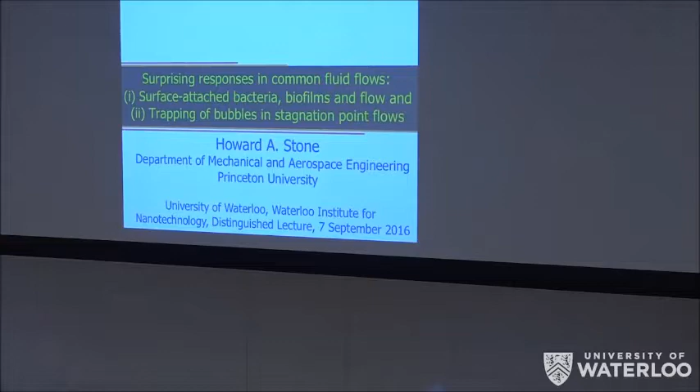But I hope I can tell you something you'll find maybe surprising, maybe interesting, and we'll see as we go. The work I've done has been done by a very talented group of people, my students and collaborators. My group at any given time is about one-third visitors.

Cody Chen in the audience just spent six months with our group. And I get to collaborate with a bunch of people in molecular biology—Professors Ned Wingreen, Bonnie Bassler, and others are all molecular biology professors I'll tell you a little about our work with today. And a variety of other short-term visitors, long-term visitors, graduate students, postdocs, and children in the presentation, I suppose, have nothing to do with the talk other than we're all human.

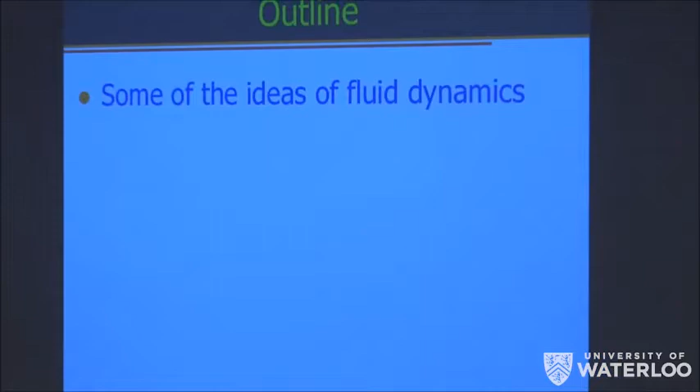Okay, so here's the outline for the talk. I'm going to start with a couple slides that just try to convince you fluid mechanics is interesting as a way to think about the world. And I'm going to have some short stories about bacteria and biofilms. What is special about them is I'm going to tell you about bacteria that live on surfaces, and in the fluid mechanical perspective, since there are fluid mechanical people in the audience, the Reynolds number in this first part of the talk is a small number.

I'll tell you about two different things that happen when you put flow over bacteria on surfaces. You are allowed to express skepticism that anything interesting should happen, since the bacteria are on the surface—the velocity at the surface is very low. What possibly interesting could happen if you have bacteria on surfaces? One reason I say that is the most common problem in fluid mechanics involving bacteria is swimming bacteria. There's a large literature—it's a field in mechanics now called active matter.

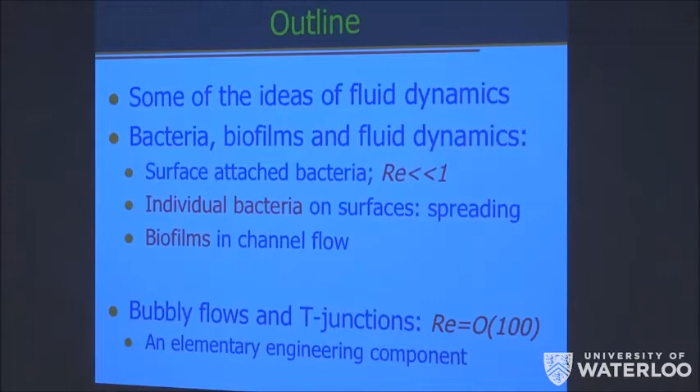The second part of the problem is a high Reynolds number flow problem. Now, I started life doing low Reynolds number hydrodynamics, so with apologies to some people who do turbulence in the audience, high Reynolds numbers for me means anywhere from 100 to 1,000. I'm going to show you flow at a T junction, which is a very simple shape. You've seen it in textbooks, and I'm going to try to convince you that the textbooks and all the researchers missed the most interesting thing associated with the flow. And then I'll try to convince you it's also important, possibly.

Okay, so first, fluid mechanics—why is it interesting? This shorebird lives in shallow water. When it gets hungry, it does the following.

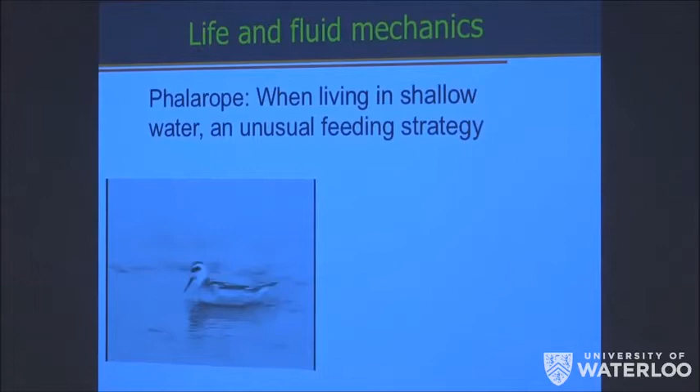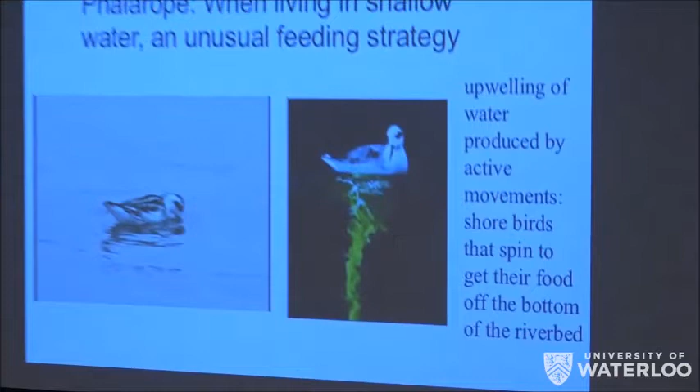Anybody know why? I should say it lives in shallow water and doesn't like to get its head wet. So it does this little routine so it can essentially eat by pecking. The shorebird, because it lives in shallow water, makes a little vortex. The vortex brings up organic matter from the bottom that floats to the surface, and the shorebird can eat without getting its head too wet. Amusing?

I was at an APS conference with 1,000 people in the audience. A former student of mine was giving a talk and showed this video. At the end there were no questions, and I hate it when there are no questions. So I stood up and said, does the fact that the shorebird knows to do this stirring of the fluid mean the shorebird knows more about fluid mechanics than we do? My former graduate student said, in front of 1,000 people, I can't speak for everyone in the audience, but I can assure you the shorebird knows more fluid mechanics than my PhD advisor.

Okay, so that was item one. Item two: the leading cause of death in the Western world associated with eating red meat. Your heart is a pump, so it's a mechanics problem—when it fails, you die. The basic feature is a modest effect associated with the radius of a channel getting clogged by fat, or if you like going to France, too much cheese. But it's a reduction in radius.

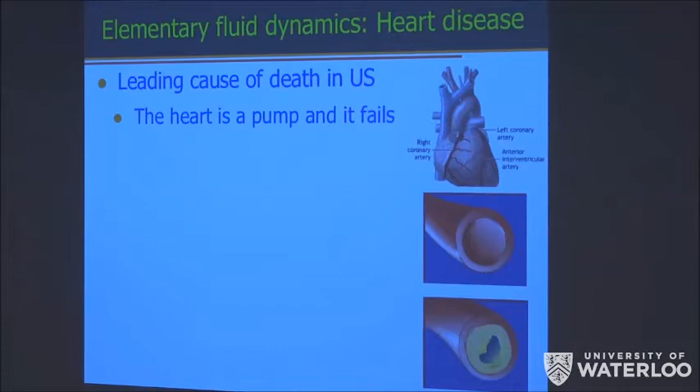This poses a fluid mechanics question you can pose as follows: if I give you a pressure drop in a pipe of a certain length, and the pipe has a certain radius, and the fluid has a certain viscosity, tell me the relationship between the pressure drop and the volumetric flow rate through the pipe. The standard textbook way to answer this is using calculus, writing down an equation, and integrating. But as stated here, you can answer everything by dimensional arguments alone, provided you recognize the dimensions of viscosity, which is standard in a fluid mechanics class, and the fact that you don't need the pressure drop and length independently—all that matters is the pressure drop per unit length of the pipe.

If you make that statement, dimensional arguments lead to the well-known Poiseuille formula, or as a French-Canadian student once insisted I pronounce it, the Poiseuille formula. The volumetric flow rate is proportional to pressure drop per unit length, inversely related to viscosity, but it depends on the fourth power of radius.

For those of you in microfluidics, you know this is a large effect, not a small effect. This geometric effect means that unlike many engineering problems where small causes produce small effects, this small cause produces a significant effect. In fact, it raises the question: if you have a 10% reduction in radius, what's the reduction in flow rate?

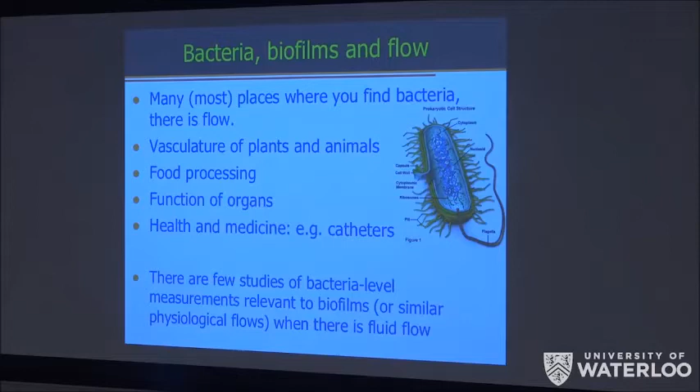What's interesting to me is that there are many studies of bacteria, and there are many studies of fluid mechanics. There are, in fact, very few studies of bacteria on surfaces when there is flow. When we started this work, there were a handful of people with very nice studies about this problem, but it was relatively sparse in terms of investigation. So I'm going to tell you about the combination today of bacteria, in particular bacteria on surfaces. When they develop a lot, they're called a biofilm, and flow.

Here's a question you're going to have to be prepared to answer in about 4 slides. I'm going to show you a network. This is a picture of the vasculature of an animal. In the lab, I'll show you a network that has some of the features of that microfluidic network. At the end, I'll also show you a plant.

The mechanics question we're going to ask: the arrows indicate the flow direction, and all the flow will go left to right. We're going to inoculate bacteria at one location in the pipe. And you're asked the question: where does the bacteria end up in this network?

The reason this is an important question is that it takes one bacteria to kill you because they will multiply. If you ask any person that does transport phenomena, or does computer modeling, their computer model will tell you the bacteria will end up following all the flow lines and will end up in the upper branch. The question is, where does the bacteria really end up?

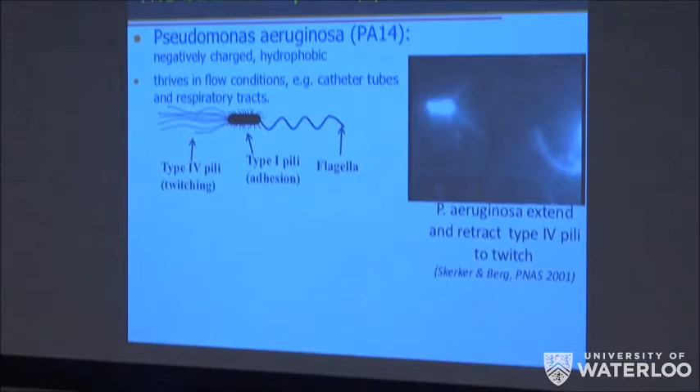So in order to introduce that idea, I'm going to tell you the following story. This bacteria, Pseudomonas aeruginosa, is a very common pathogen. If you have a compromised immune system and you're in a hospital, it will kill you. It's this rod-shaped bacteria with a flagella.

When the bacteria sticks to the surface, it loses its flagella, which is for swimming. It has other appendages along its body called pili. All the pili help the bacteria adhere to the surface. But these long appendages in front, the so-called type 4 pili, in Pseudomonas aeruginosa are motorized. Via a depolymerization process they can shorten, and in shortening they apply forces that pull the bacteria along the surface. In the language of molecular biology, that's called twitching motility.

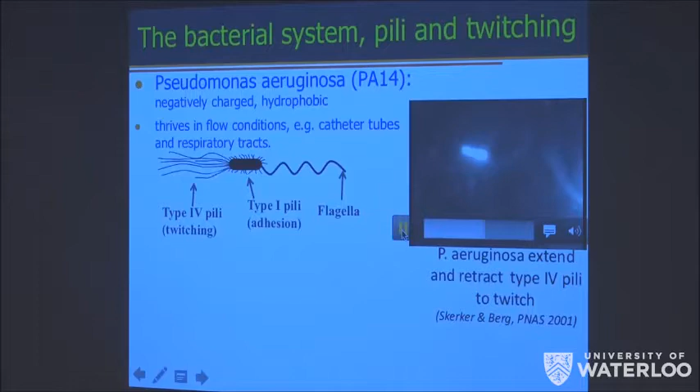The common idea about this twitching motility is it lets the bacteria randomly search its surface, maybe for food or whatever, letting it do random motions. That's the suggestion. What my graduate student Yi Shen discovered was that when Pseudomonas aeruginosa is exposed to flow, using standard microfluidic methods to study this, something else happens.

To make the experiment clear — and there are many experts in the audience who know much more than I about microfluidics — the flow is from top to bottom. Think of the boundary as a zero velocity boundary. There's certainly a stress that the fluid puts on the bacteria. Now you ask, where do the bacteria go in the presence of this flow? Some fraction of bacteria are going which way?

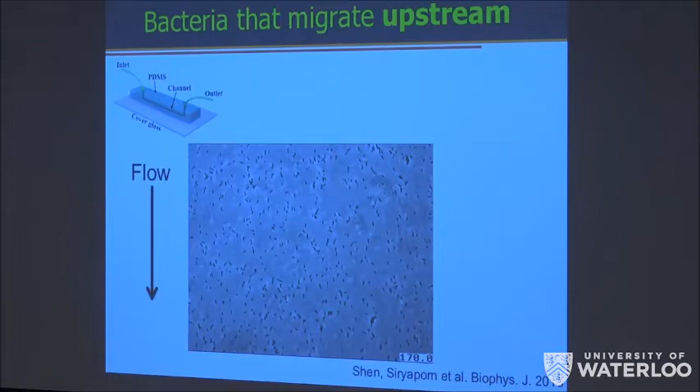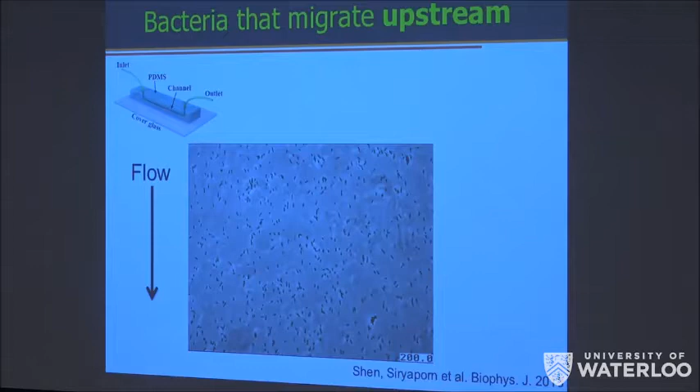Upstream. So I'm going to use the word discovered, though it turns out that's an overstatement. What we found — it's just easier to say, sounds more impressive — is that in the presence of flow and this twitching motility, some fraction of the bacteria go opposite the flow direction. They go upstream. I'm going to tell you a little about how it happens, why it happens, and a consequence of that.

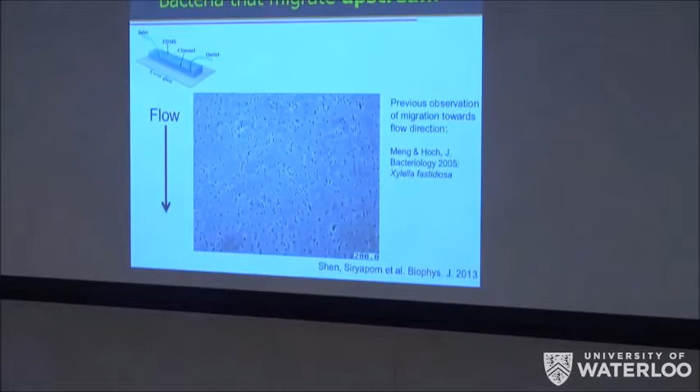This was one of the first things we did, and I'd like to say we discovered it. It turns out when we were about to submit our paper, we found in the literature an obscure but very beautiful paper by a group of people studying plant biology, who had identified a pathogen that lives on a leaf, starts on a leaf, and ends up inside the plant.

They hypothesized that since the plant is pumping water upward, the bacteria was somehow working its way opposite the flow of water. So there was already a hint in the literature in this paper, and we've analyzed this in great detail.

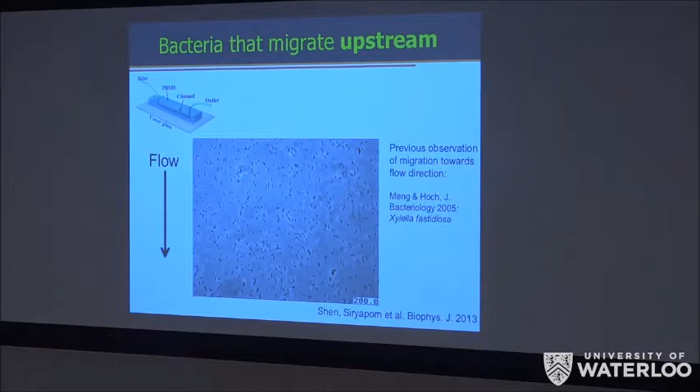So how does this happen? This bacteria has appendages that are motorized, as I showed you in that movie, and these appendages help it stick to the surface. When a rod-shaped bacteria sticks to the surface and experiences a shear flow, it experiences a stress that flips the bacteria. It doesn't matter how the bacteria falls on the surface - no matter what orientation, it's going to have some component of its direction of motility directed upstream. So the rod shape means it flips, and the motility means it now walks upstream.

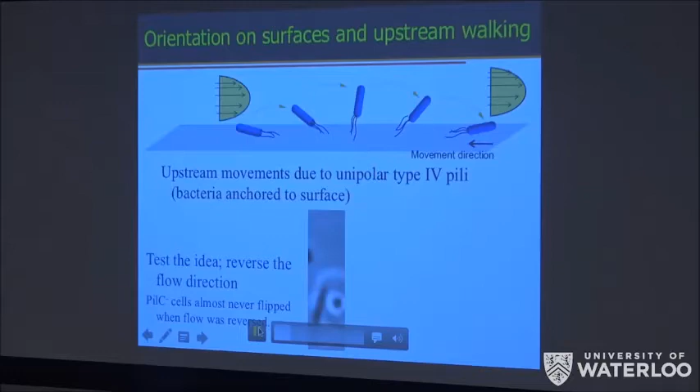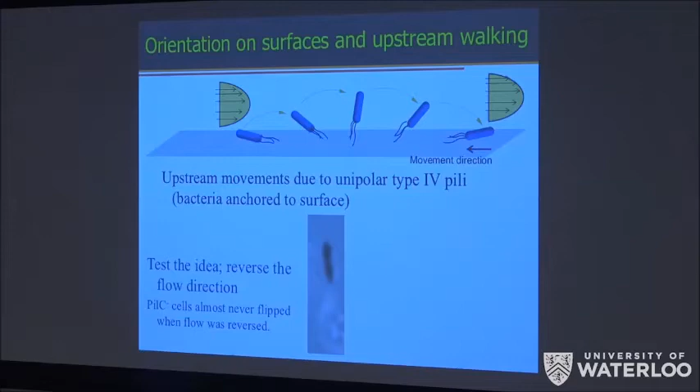The evidence for that is shown by the movie at the bottom that a man named Alex Persat suggested to us. We put particles in the flow to show the velocity going top to bottom. Halfway through this experiment, we flip the flow direction. This bacteria is about to divide - you can see it's almost 2 cells. When you change the flow direction, the bacteria flips because it's polar localized at the attachment point. So this is indirect evidence for exactly how this bacteria is able to migrate upstream.

What is the consequence of that? A consequence is this experiment. So now you ask, if you have a bacteria that lives on surfaces but is motile - it's like anything else, like colloids, you'd solve convective diffusion equations, which just tells you things follow the flow. But here you have an object that, because it's living, is capable of moving opposite the flow direction, and you have a network that has junctions that change where you go.

So we're going to inoculate the flow where the laser pointer is pointing. The experiment uses 2 types of bacteria - it's the advantage of being an engineer who doesn't know much biology but has many colleagues in molecular biology who are both nice people and world-class scientists. We test wild-type bacteria which have motility, and a mutant called pilTU, which has the appendage but it's not motorized - it can't do this pulling, so it's a stationary bacteria.

The consequence of this is now when you do this kind of flow experiment, the non-motile bacteria is confined to the upper channel. It actually forms a biofilm-like structure. The black bacteria, which is wild type, some fraction of them can walk upstream. When they lose connection with the surface, they end up in the lower channel. The consequence is you end up with bacteria now in a network that you would not otherwise suspect if you weren't aware of this local feature.

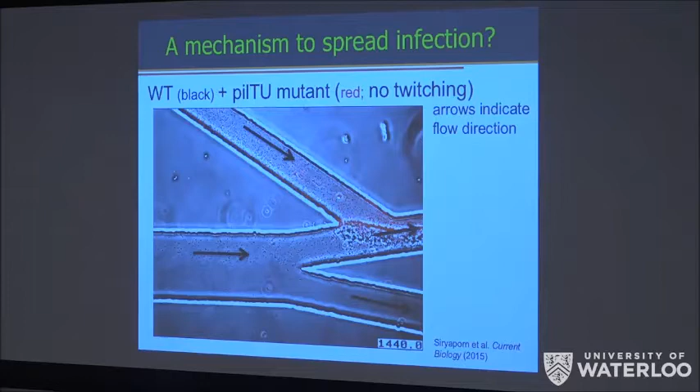Okay, so that's short story 1. You end up with, in this bottom channel, bacteria. We've been doing a little work over the last 1.5 years to try to make an effective convective diffusion model of a system that's a network with both motile objects capable of upstream migration and non-motile objects, just to show the effect.

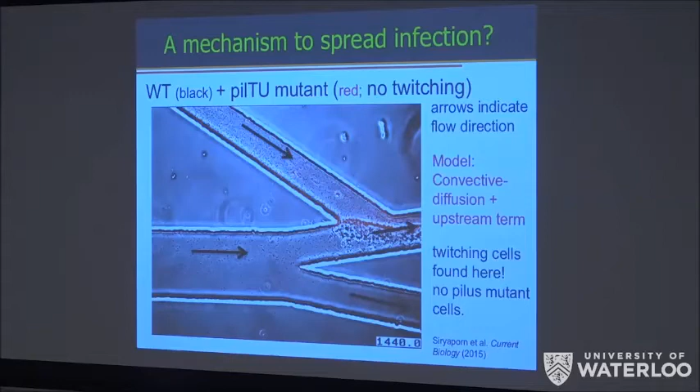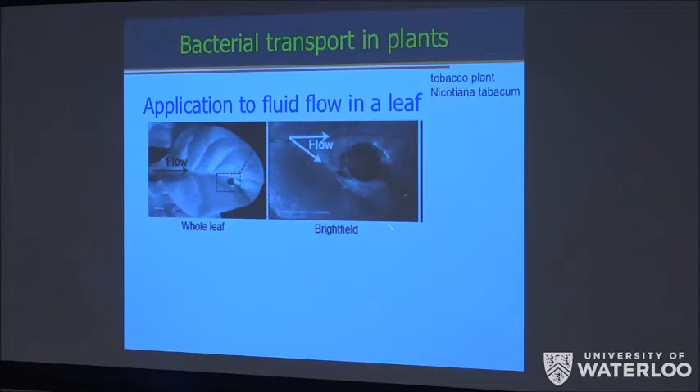Anyway, so that's short story 1 - upstream migration in flow, trying to predict the possibility of infection of surface motile bacteria. The way we applied it in our paper is we took a plant. The plant is driving flow from the stem to the right side. There's a place where we will inoculate an infection, and we do the same kind of experiment.

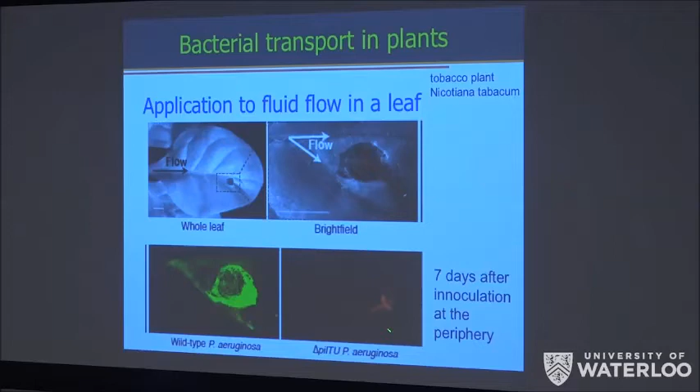The green bacteria is motile, the red bacteria is non-motile, and over the period of a week, the green motile bacteria can migrate all the way to the source of the flow, to the stem, while the red bacteria is confined to where you place it in the system. So that's an artificial experiment with a living system that shows the same kind of upstream migration, here with a flow that's driven by the plant.

Okay, so that's short story 1. We almost had nano - I mean, if you really insist, the appendages are nano objects. Well, I'm not going to apologize. You invited me, so you get what you get.

Okay, so the next thing I want to do is move from individual bacteria to collectives of bacteria. Collectives of bacteria are called biofilms.

This project has grown over many years with a large group of people. Biofilm is a collection of polymer and cells, and there's bacteria on surfaces.

If you have children that don't brush their teeth in the morning, the gunk that forms on the teeth is a biofilm. If you're out in the wild and you end up with slimy surfaces, that's a biofilm. If you look at wounds or pus, there are biofilms there. So biofilms are in lots of places.

There's some combination of cells producing a polymeric material that is both adhesive and protects the bacteria. We generally think about these as bad. If you're a material scientist, there are lots of efforts around the world to try and design surfaces to minimize the growth of biofilms. But biofilms can be good.

They're used in water treatment. You have inside your mouth something like hundreds of species of bacteria that help keep you healthy, et cetera. So these are very commonplace. And it's been known for 30 or 40 years that the most common bacteria are in biofilms. They live on surfaces, not as planktonic or free-swimming bacteria.

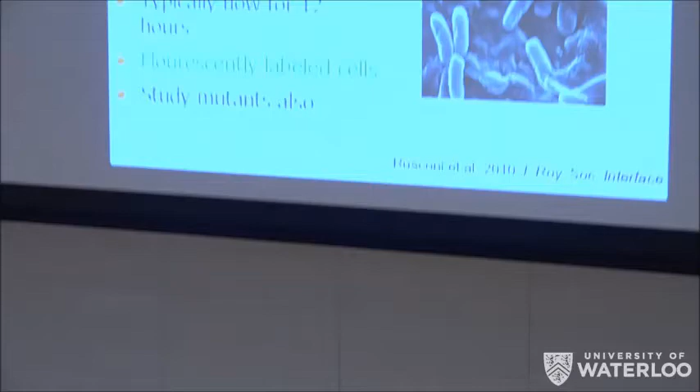This goes back a number of years, but we started to do flow experiments with bacteria, a little like the ones I showed you. I can't exactly remember why we began with this experiment, but it went something like this. We were doing microfluidics, asked to look at how surfaces respond to flow when there are bacteria around. So we did so-called low Reynolds number experiments.

I'm going to color lots of things green now because the bacteria we're going to use, the Pseudomonas aeruginosa, has a green fluorescent protein in it. So where you see green, they're bacteria.

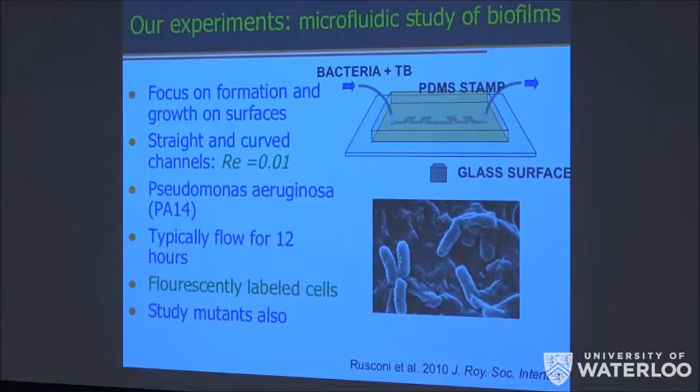We made channels that had these kind of funny shapes with bends in them. It was partly accidental, and I'm going to try to show you in a second that it's important. We use this bacteria I already told you about. We started by doing 12-hour experiments - turns out that's important - and we ended up doing 100-hour experiments.

Green is fluorescently labeled cells. We have a whole study on mutants I'm not going to tell you about. Just to defend myself a little, since the most common channel is a straight channel, why might bends matter?

Everyone in the audience is sitting with your elbows bent. Both in this part of the talk and the last part, I'm going to claim that's an important thing to study, and it's not my fault that most researchers and most textbooks don't pay a lot of attention to it. And the second thing is we have to do long time experiments.

We got lucky in our first few experiments that we were longer than the time scale, so we saw something interesting. You need a long time experiment to see that in these systems. So two things happened that were accidental, both shape and time, that turned out to be important.

So here's the first part of the story. If the channel is straight, we never see anything interesting. The bacteria, we grow them on the surface, and they're on the surface all the time. They just slowly get bigger - the biofilm just slowly gets thicker in time. To make that clear, if this was the inside of a pipe, the biofilm would be on all the surfaces, and it would just accumulate in time.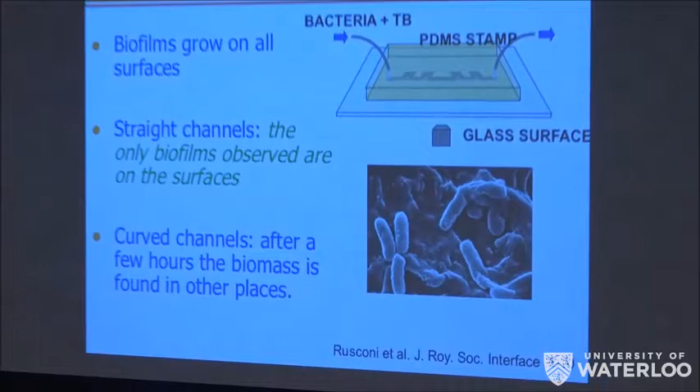When the channel has a bend in it, and as far as we can tell it doesn't matter what the bend looks like, any kind of curve - when the channel has a curve in it, something else happens, and that's shown here. In the middle of the experiment, we're going to take a confocal microscope and scan from the bottom of the channel, where you have a biofilm, to the top of the channel, where you'll also find a biofilm.

If you do that some number of hours after you start the experiment, when you leave the surface, you lose the biofilm. This image is exactly in the middle of the channel, and when you leave the middle of the channel, you find the biofilm on the other wall. So what this experiment shows, which as far as we can tell no one in this literature had ever noticed when studying how soft materials clog, is that in the middle of the channel there's a string of biofilm.

So this is now the second part of my talk. I'm going to tell you about something floating in the middle of the channel.

Okay, I've watched this movie hundreds, if not thousands of times. I can tell you the following story, which professors and graduate students both might appreciate for different reasons. When my group came and showed me this experiment, they said, look at this. I said, it can't happen.

It's impossible, I said, because I've studied low Reynolds number hydrodynamics for 20 years, and I know there's nothing interesting about low Reynolds number hydrodynamics in this system, especially in the middle of a channel. They simply looked at me and said, it happens in every experiment we do. I'm now going to try and tell you the story behind this. I should say also, it's quite generic, I think, what I'm saying.

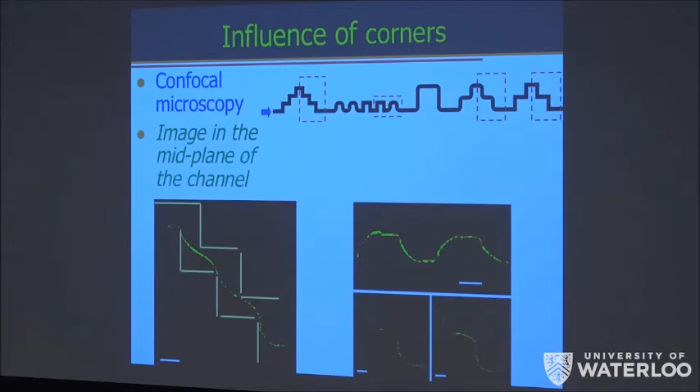So the reason for that statement is we then started to do channels with arbitrarily shaped geometries: some with sharp corners, some with round corners, some with short distance between corners, some with long distance between corners. We first prepare a biofilm, and then we start a flow. Whenever we see this string of material, which had been noticed in a few places and called a streamer, we'll call it a biofilm streamer. If you see it in one place in the channel, and you look many other places in the channel, you also see it. So it's not as if, or at least we have lots of evidence that says it's not true.

It's not as if you pull a string out of your experiment and extend it along the channel. If you see it at a corner, you see it at many corners, and wherever you look in the channel, you see it at corners. Okay? It seems to be a corner effect, an effect associated with changes of direction.

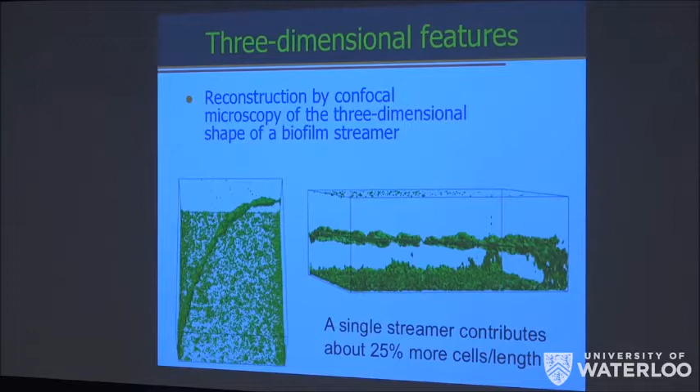So we refer to it as a biofilm streamer. I've shown you a video that shows it sort of in the middle of the channel. If you do a three-dimensional confocal reconstruction of this structure, this is kind of smoothed out. There's a biofilm at the bottom, there's a biofilm cut off at the top, and floating down the middle is a string of biofilm. Other images of this show us what looks a lot more like many filaments of biofilm, but all localized near the middle. You're allowed to ask what's special about the middle. I'll try and tell you what we think is associated with that.

Now, let me say why this picture is important if you go into the literature on engineering of systems or how things clog. The standard picture of how things clog, which is in the engineering literature, physics literature, applied math literature, biology literature, is biofilms grow on surfaces. Flow delivers nutrients to surfaces, things grow on surfaces, and clogging happens because things start on the surface and grow inward. That's in every model. Well, if there is a model, the model has that feature.

What I'm going to show you is that, at least in our experiments, sometime after you start the experiment, you get a string in the middle of the channel, and the string grows from the middle outward. Our experiments always clog from the inside out, not from the outside in. They're completely opposite the way every model in the literature tells you clogging happens, because every model in the literature makes a math statement, which is, oh, it looks like a reaction diffusion problem. Ours looks like the picture on the slide.

Okay, so it happens with this bacteria, Pseudomonas aeruginosa. It happens with most bacteria we've tried. We've done different kinds of bacteria, and we always see the same kind of structure associated with corners and biofilms, these so-called biofilm streamers. It seems to be a corner effect. Here's a slide that suggests it's a corner effect.

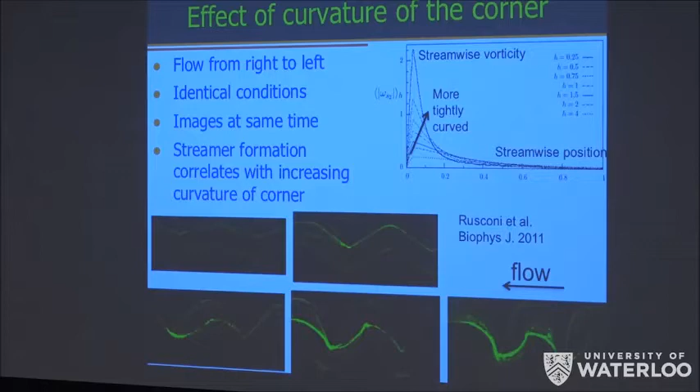In the upper right is a fluid mechanical calculation we've done, I'll tell you about in a second. The experiment we tried to do was we set it up a certain way, and tried to run it for 20 hours. For channels that were nearly straight, or slightly more bent, or more curved with increasing curvature, we tried to change the curvature at the corner.

We took a picture at identical times and showed experimentally that as you change the curvature, you get more biofilm at the corner for the same amount of time. We correlated the formation of the so-called streamer structure, its accumulation, with the radius of curvature at the corner. The upper right shows a single-phase fluid mechanical calculation using asymptotic methods, showing that the strength of the axial vorticity at a corner increases with the curvature.

The axial vorticity is associated not with axial flow, but with a flow with swirl in it, which a fluid mechanics person would call the secondary flow in the neighborhood of the corner. So we use theory and experiments to suggest that this secondary flow at a corner is associated with these structures—let me skip ahead, and then I'll show you a movie.

The secondary flow at the corner in a low Reynolds number system is associated with these structures being formed. It's like flow along a pipe, but now the flow is actually swirling. The theory of low Reynolds number hydrodynamics tells you that around a symmetric corner, there's a plane of symmetry, and the flow has to change sign. The secondary flow has to change sign in front of the corner and downstream of the corner. So upstream of the corner, the secondary flow is going away from the middle of the channel. Downstream of the corner, the secondary flow is going towards the middle of the channel. We've suggested, though we can't prove, that it's the nature of the secondary flow that's accumulating things into the middle of the channel causing this effect.

So the way we model this is we combined elasticity and fluid mechanics. A filament in a flow, it turns out, can't follow a streamline. We modeled it as Euler's elastica or something like that, trying to understand what soft filaments do in a fluid flow. This movie gives you an idea that there's something about the nature of the softness of the material—a rheology question, not a biology question—that's leading to the formation of these structures.

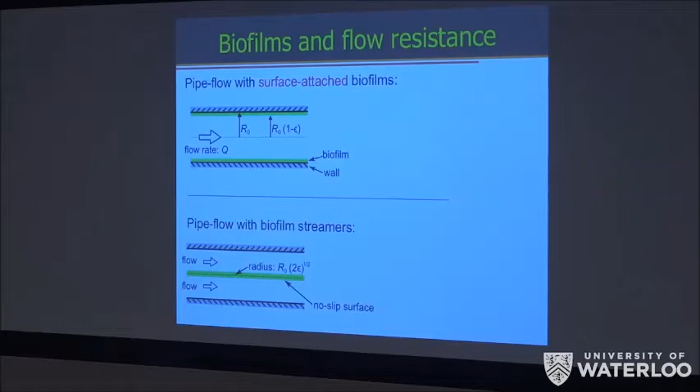Okay, so now, how do systems clog? Here's why a small amount of biofilm in this experiment matters not a little, but a lot. Oh, and I should say—I'm having a senior moment, what was I about to say? Oh yeah, I need to convince you of the following thing, or at least suggest it.

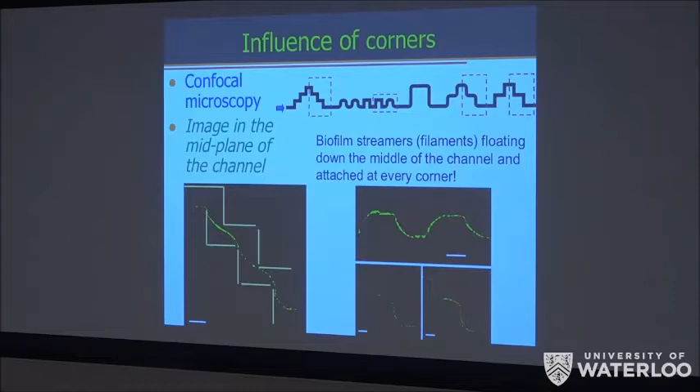Any kind of porous media is going to have these features: small dimensions, sharp corners, round corners, and random stuff. So my claim is, if you see this in this kind of experiment, then any porous system you see is likely to have these features—low Reynolds number flows, changes in flow direction, et cetera.

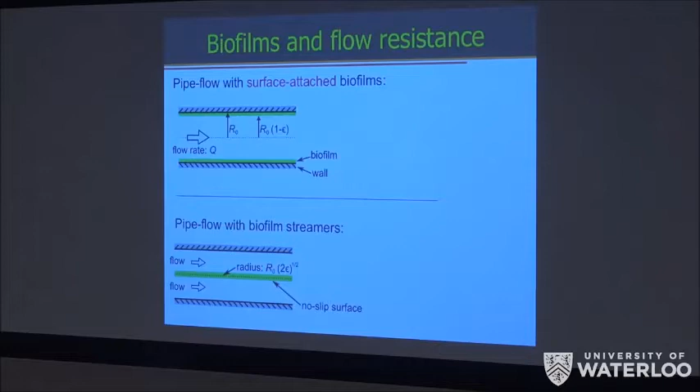Okay, so here's a math question you can answer. Suppose I give you flow in a pipe, with radius r0, and now you reduce the radius of the pipe by epsilon. How does the flow rate change? Well, we saw that at the beginning of the talk—there's the Poiseuille formula with the radius to the 4th power. So when you reduce the radius by epsilon, you reduce the flow rate by 4 epsilon.

So the textbook problem is that when you have a biofilm present and you've reduced the radius a little, the flow rate goes down a little. I'm going to put epsilon equal to 0.01 into this formula in a second—it's pretty boring, right? But here's a textbook problem that's in fluid mechanics textbooks that never made it into the literature on biofilm or bacterial clogging: our experiment shows that sometime after you start the experiment, the biofilm isn't just on the surface—it's in the middle of the channel as an elastic material.

So now you solve a flow in a pipe with a pipe at the center, and you make the radius of the pipe the same amount as the biofilm thickness at the top. If you do that, you've now put a no-slip boundary condition effectively in the middle of the pipe, where the flow is fastest. The change in flow rate is given asymptotically, when epsilon is small, by the formula: Q biofilm divided by Q clean channel equals 1 plus 2 over log epsilon. If you put epsilon at 0.01, meaning 1% biofilm, it doesn't do much at the top, but it reduces the flow rate at the bottom by 50%.

So here's a geometric effect that's catastrophic to you. It's not a small effect. Because it's a 3-dimensional effect, it completely changes the pressure drop flow rate relation.

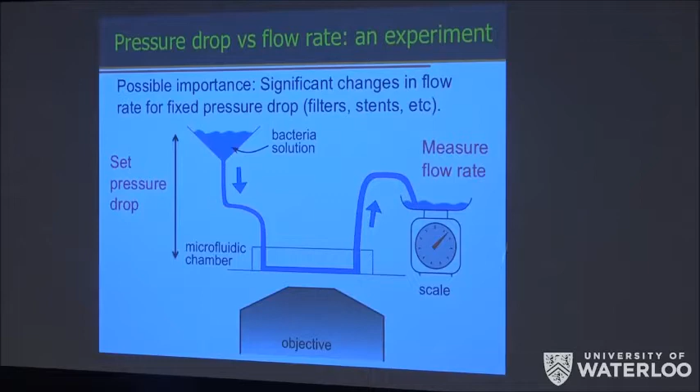To give you evidence that this is roughly what happens, we did experiments where, in most microfluidic experiments, including my lab, we do flow rate control. Here, you guys are smart, so you do pressure control. We did pressure control with just a little hydrostatic head. We imaged growth of the biofilm during the pressure-driven flow, and kept track of how much material came out. I didn't have a lot of money, so we couldn't buy fluid pumps, so we just did things this way. And we measured mass flow rate as a function of time.

I thought things were going to be boring, but they look like this. For most of the experiment, nothing happens. For 50 hours in this experiment, nothing really happened. The flow rate went down a little. Why? There's a little biofilm on the surface. As soon as the biofilm streamer forms, it rapidly grows in time, and the flow rate goes to zero over about 2 hours. So here's evidence for this, if you like, clogging from the inside out.

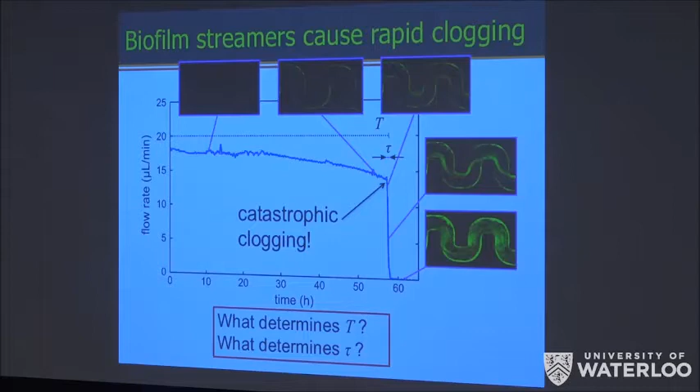This idea suggests that to understand this problem, there are at least two time scales: a long time scale until the streamer forms, and then a short time scale associated with the rapid formation of the streamer. We've tried to study some part of this, and we've tried to see what biocides do to it, et cetera.

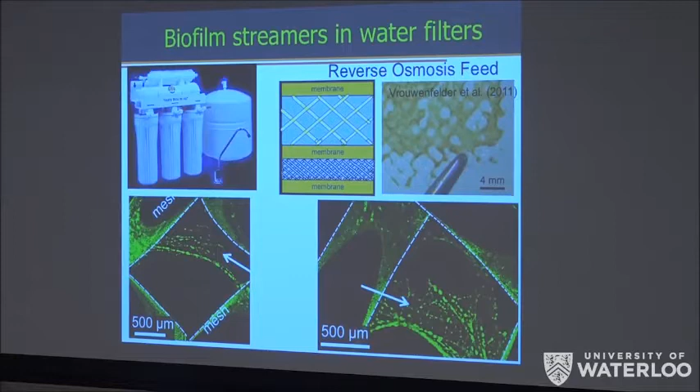But I'll stop with that, and show you one more thing. Why might this be real? We did experiments with a number of real systems. Here's a water filter made up of a metal mesh, sold by major companies. It's very common. The picture of biofilms people talk about is that biofilms are on surfaces. In our experiment, once you form a biofilm on the surface, you also get these streamer-like elements forming a mesh-like network over everything. So these streamer-like elements are found in other places, not just in this little laboratory experiment we did.

OK, so that's my second part. Now I'm going to go to the third part.

But before the third part, I have a little short story, about this man, Harden McConnell, who was one of America's great physical chemists in the 20th century. I had the good fortune to work with him for a short time. He studied physical chemistry problems, but started to work on some fluid mechanics problems. I knew some people in his research group. He was at Stanford, and one day one of his graduate students sent me an email saying Harden left the group meeting furious, muttering this phrase as he walked out: 'Biology was invented by God. Physical chemistry was invented by nice people. Fluid mechanics was invented by the devil.' OK, I've always liked that phrase.

All right, so the last thing I want to tell you about is another simple geometry. It again has a bend in it, so I'm going to refer to your elbows—if you don't think this is important, keep your arms straight for the rest of your life. I'm going to tell you about a two-phase flow T-junction, but some of the things I'll tell you are single-phase flow results. A large group of people have contributed to this. The Reynolds number here is fairly large, so the explanation I'll give is different, because it's a high Reynolds number, not a low Reynolds number flow problem. I think this is interesting because this T-shape is just common—it's found in lots of places. You find it in the lab, and in all piping systems where you're distributing fluids.

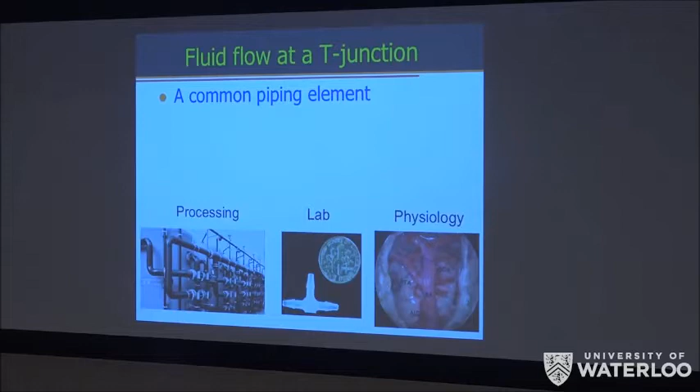There is one thing special I'm going to tell you about: in every case, the flow comes from the top of the T and branches symmetrically to the side. You can do this other ways - you can come from the side and go out the other two - but in every case here, we're going to come from the top and branch.

The Reynolds number is big. The Reynolds number is defined just like you do.

I've given this talk a bunch of times. I've never been able to get a grant on this for 4 years. I'm going to now go out on a limb. I'm going to claim that I'm going to show you something new in fluid mechanics. It's not in the research literature, except for our papers. It's not in textbooks - I'm going to show you why it should be.

I'll claim also a new kind of instability in the fluid mechanics literature that no one pointed out. There are lots of numerical studies of this, but all the numerics people missed it, because they never asked a good question. They didn't make a careful plot of what happened as the Reynolds number systematically increased in this configuration. If they had, they would have discovered an unusual effect. That's what I'm now going to tell you.

So here's the experiment we do: flow in a T junction, in at the top, out at the sides. Reynolds number is ordinary.

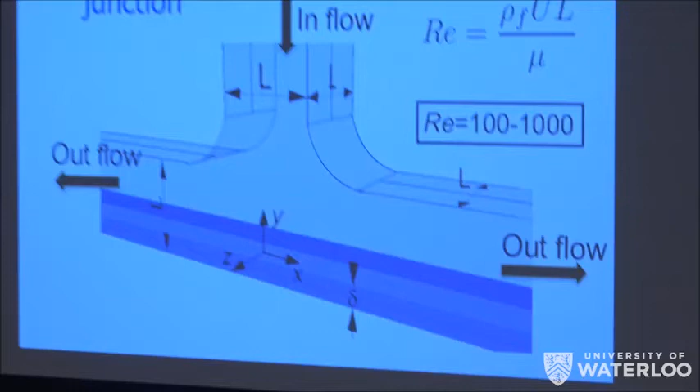We were first looking at - you go to a professor and say, sketch the flow. We were talking about this morning, Jean-Pierre, right? And if you were to sketch the flow, this is what I did. I said, well, it sort of looks like that. Yeah, how could it not? Flow comes in, it goes like that.

There's a stagnation point at the boundary. If I ask you, if I put objects in the flow, is a stagnation point a stable point or an unstable point? What might you say?

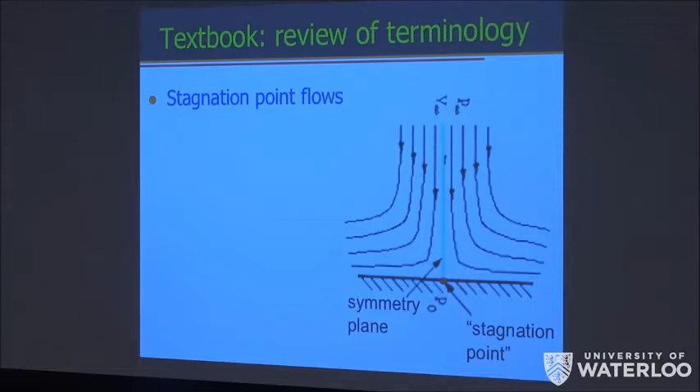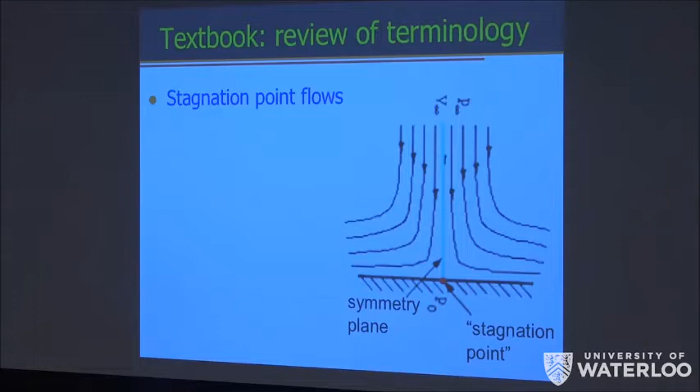Objects come in, they're going to go away. So you might say, from a nonlinear dynamics point of view, it must be an unstable point. So if you put rigid particles in the flow - these are glass particles, about 4.5 times as dense as water - they come in at the top. There are some complicated trajectories, but they all leave.

I should say we were doing this because we were trying to understand the speed that particles impact the wall, to understand damage to a wall. There's a short story behind that. But this is what a typical experiment looks like when the Reynolds number is a few hundred and you slow down the video. Except one day, bubbles got stuck in the flow.

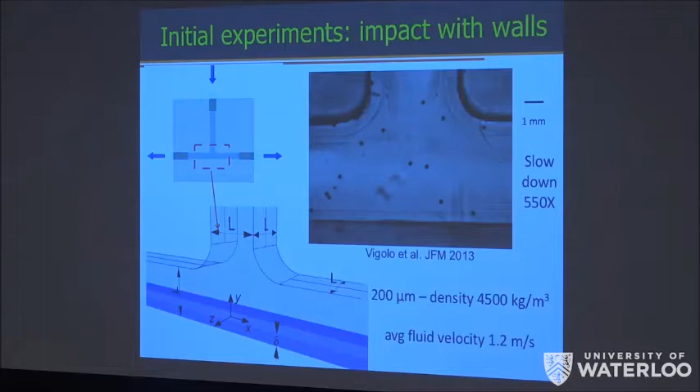So gas bubbles, a standard 2-phase flow. When gas bubbles get stuck in the flow, and you take a high-speed video of the flow, you see what's on the video screen. And it doesn't matter what the orientation is of the pipe - this is the effect that happens. Things accumulate there. They don't leave.

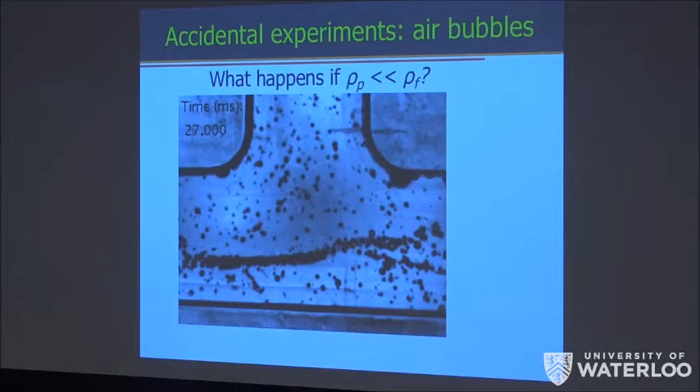Kind of see that? OK, so this is the story that I want to suggest: there's something interesting about this geometry. As far as we can tell, this wasn't in the 2-phase flow literature, and it wasn't in the single-phase flow literature. I now want to spend 10 minutes and tell you about this kind of unusual observation, which I think might be interesting because it's such a simple geometry.

Let me just emphasize, bubbles aren't important in this case. What really is important is density difference. But as far as we can tell, gravity doesn't play any role in this - it doesn't matter what the orientation of the pipe is. I should say in this experiment, the pipe is about 1 millimeter in width, square cross-section. The bubbles are a few hundred microns. We typically add some surfactant - natural surfactants present sometimes keep the bubbles from coalescing. But things accumulate.

Now I get to try and explain where this comes from. I told someone the story this morning: we had this for two years. We had all these observations, we knew it happened, we had categorized it, but we had no idea why. One reason we had no idea why was I was making a blunder.

The blunder was the slide I just showed you about sketching streamlines. I kept sketching this and said, how does this flow ever trap anything? This sketch, which all professors would typically make if they weren't thinking clearly, has a flaw in it. It's a 2-dimensional sketch. What I'm now going to tell you is this flow is fundamentally 3-dimensional, and that changes everything.

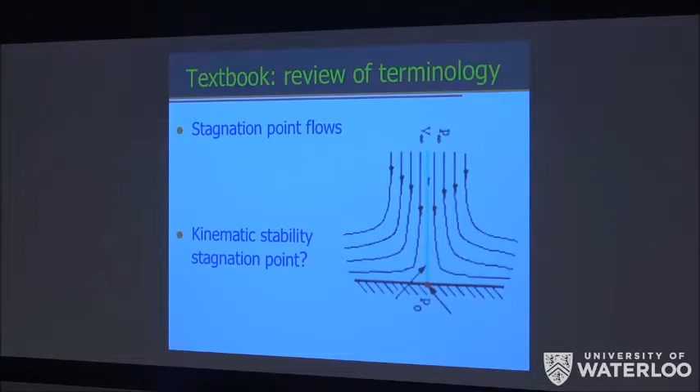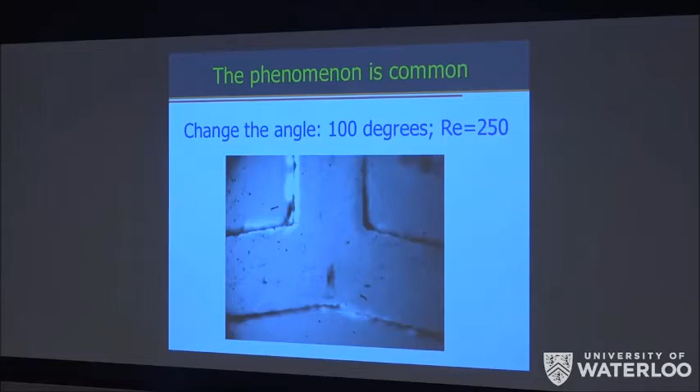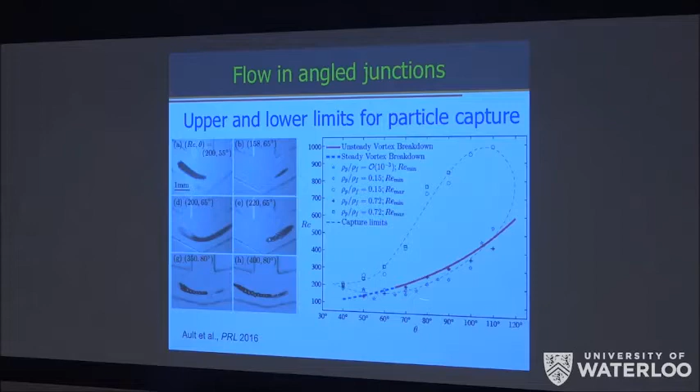We've mapped all of this out. If you were interested, we've made a diagram: you tell me the Reynolds number, you tell me the junction angle, and there's a region where you will trap bubbles. Below the lower boundary, the flow isn't strong enough, so you don't trap. In this region, you trap. If you have a given shape and the Reynolds number is too large, the flow is turbulent and everything gets blown out. But there's always a region of several hundred in Reynolds number where you trap.

The last 5 minutes of the talk, I'm going to tell you where this solid line comes from. It basically comes from an argument for how this happens, and we can rationalize the bottom boundary using a single-phase flow idea.

Flow in a channel—so your elbow, if you want to explain to your friend what flow in an elbow looks like and how it's different from flow in a straight pipe, the fluid mechanical picture goes back to a man named Dean, 80 years ago, so it's called Dean flow. You know what Poiseuille flow in a pipe is like—those are the solid lines coming out at you, telling you lines of constant velocity. But when you go around a curve at modest Reynolds numbers, the flow has a secondary flow structure.

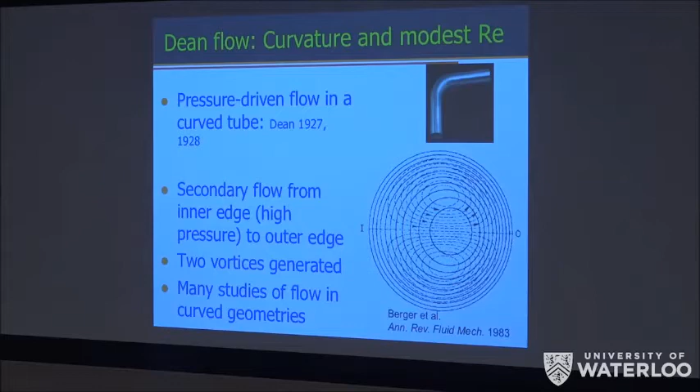That's the curved line, so I'm going to try and draw it here. If I'm following the fluid and trying to turn a corner, following Mr. Dean—if this is the inside of the corner, labeled I, and over here is the outside of the corner, labeled O—the flow goes from the inside to the outside. As I go around the corner, the flow does this: two vortices get formed, like that. That's what this is trying to show.

So this secondary flow is telling you it's not a closed vortex, but an open vortex—there's a flow coming out at you.

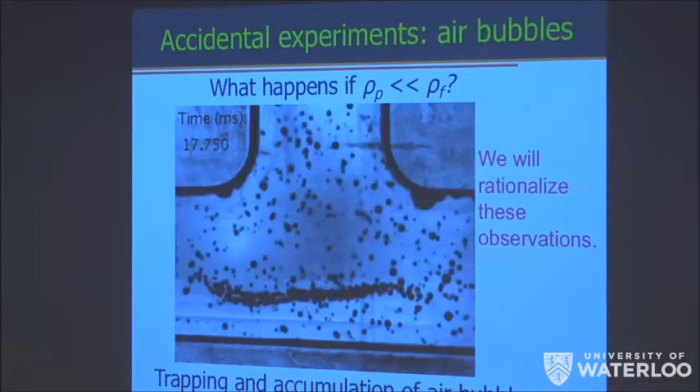If I now show you this movie again, look at it realizing the flow is three-dimensional, with two vortices sitting in the flow on either side where you turn the corner. You'll start to see there's a line of bubbles, and another line behind it—they're marking two vortices in the flow. If you're a turbulent flow person, you know you find vortices by putting bubbles in a flow. What's unusual here is the bubbles don't leave, they get trapped. So it's not simply like a turbulent flow where I put bubbles in and they find vortices—in this flow, vortices form naturally, and those bubbles tend to accumulate and get trapped. That's the Dean flow idea.

In the fluid mechanics literature, I was aware of this at the time, though I didn't know what it meant. There's a term called vortex breakdown. It's normally only studied by people who take a straight pipe with fast flow along the pipe, and add a lot of swirl to it.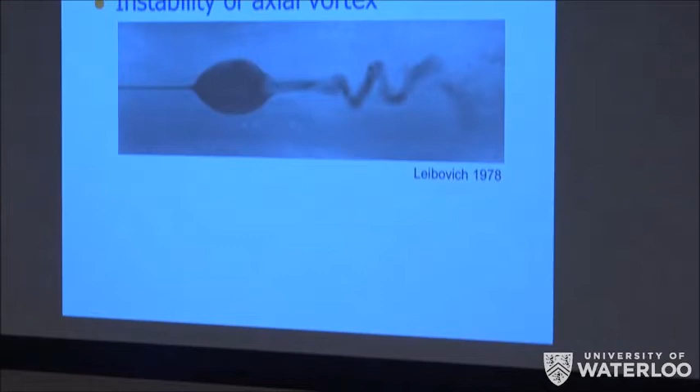When you add a lot of swirl to the pipe, above a critical swirl speed, the fluid comes in. If you put a little dye in, there's a burst that forms a bubble-like structure of ink, and then the ink slowly leaks out. This cavity is called the vortex breakdown bubble.

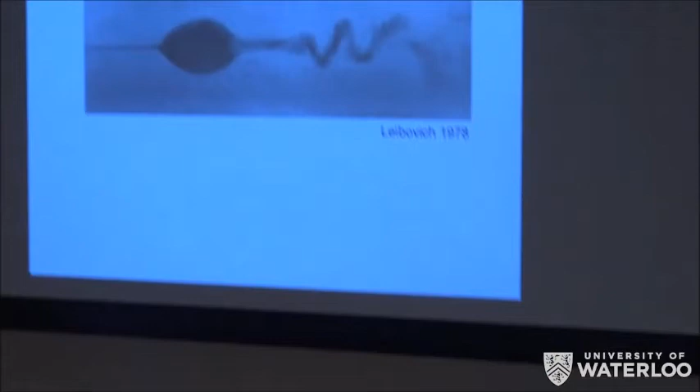It's always associated with these kind of artificial laboratory scale flows where you have a straight pipe with artificially induced swirl, and above a critical speed you get a vortex breakdown bubble. I'm now going to claim that in the standard T junction, in every engineering system, this is possible, even though the flow is changing direction, because vortices get formed.

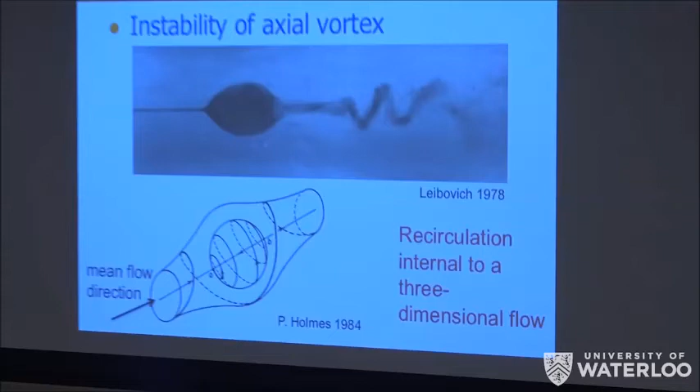There's a little sketch from my colleague at Princeton, Phil Holmes, about what this might look like, that inside the flow there's a trapped cavity of liquid. This might be weird if you've ever thought about flow: inside an ordinary flow, you can trap pockets of fluid that just circulate. Here's a numerical simulation that has the idea, and then I'm going to show you an experiment.

We got lucky. I had a visitor in another department, Stefan Radl, who was an expert on numerical methods. One day he walked into our lab with a three-dimensional numerical simulation that suggested what was going on. So here's streamlines shown in red.

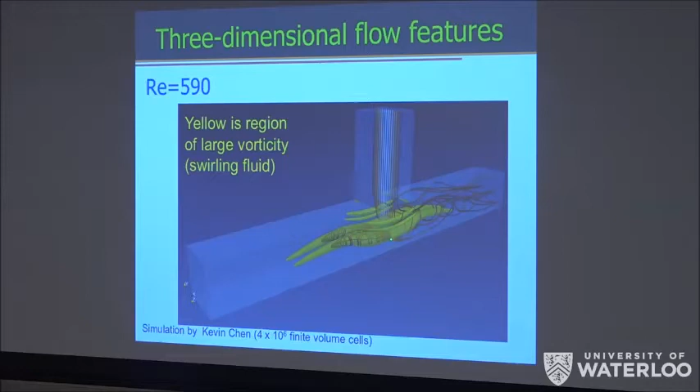Yellow means regions of high vorticity, high swirl if you like. There's streamlines that leave, they come in and leave. Above a critical Reynolds number, here close to 600 for a 90-degree bend, there's streamlines that are going in a circle, going on a tube if you like. They hit a stagnation point and come running back down the middle. There's closed streamlines inside a fluid flow.

Jean-Pierre, you ever seen something like that? Okay.

So this is what the numerical simulation shows. We've shown it with three different numerical simulations, simply because one year my proposal got turned down by people saying it was all numerical error, even though I had an experiment.

So this feature, I'm going to argue, is a vortex breakdown-like structure, just like this laboratory experiment I showed you before. A bubble, a pocket of fluid, where all the fluid's going past it, and it's just circulating inside.

So what this three-dimensional flow at this T junction does, which I'm going to claim is very common over ranges of hundreds of Reynolds numbers, is the change in direction creates this vortex. The vortex, above a critical Reynolds number, has this so-called breakdown phenomena. It has a stagnation point in the flow that causes a trapped pocket of fluid. And so the bubbles simply can't leave—they get trapped by the vortex, above a critical speed.

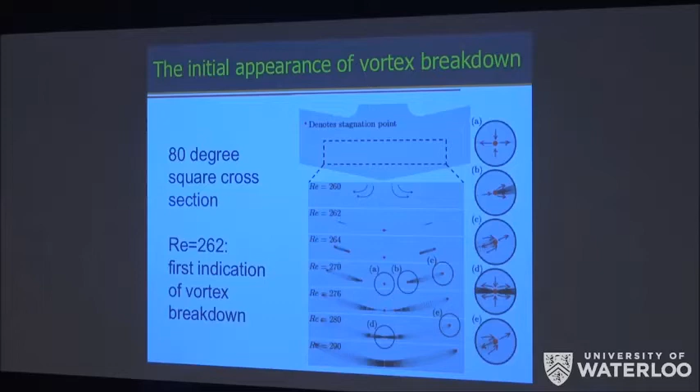That's kind of what this has to do with lots of things. We've done lots of numerical simulations. That's telling me I'm almost done. Maybe in the interest of time, I'd rather answer questions. So there are lots of questions you could ask about this.

We've been trying to ask many of them, although the geometry means it's hard to do anything with pencil and paper. But you can ask, given this, how might you clean systems that have these trapped pockets of fluid above a critical Reynolds number? We've gone back to study the Dean flow problem. My colleague Clancy Rowley likes the term bifurcation at a bifurcation—the flow has a bifurcation, and the T junction looks like a bifurcation.

Okay, so here's your quiz. Given what I just told you, suppose someone says to you: clean ink out of a pipe. The pipe just happens to have a T shape.

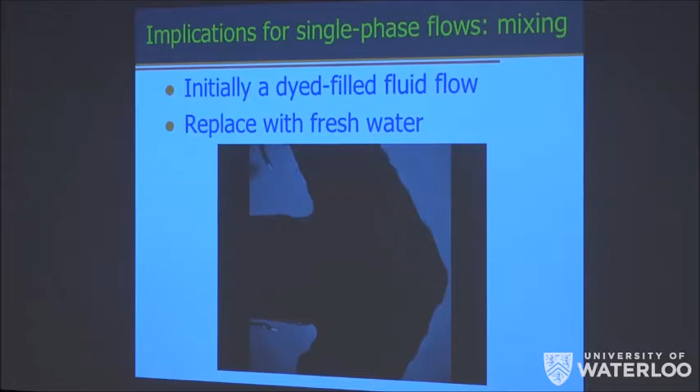Please tell me how long it's going to take, and I'll tell you how fast the flow speed is. So this is ink in a pipe. We're going to turn on the flow and ask, how long does it take to clean the pipe? You're going to say, can't be long, right? So there's a long lead time here.

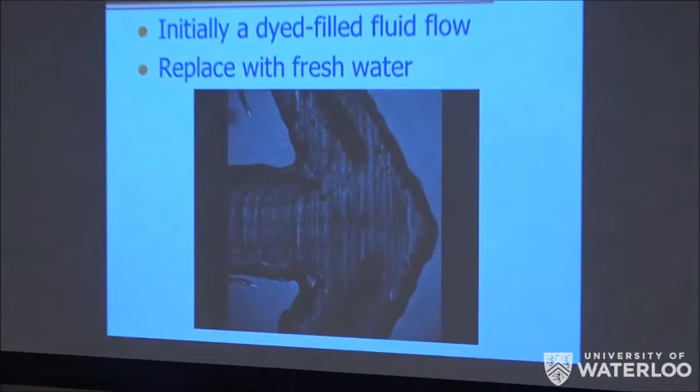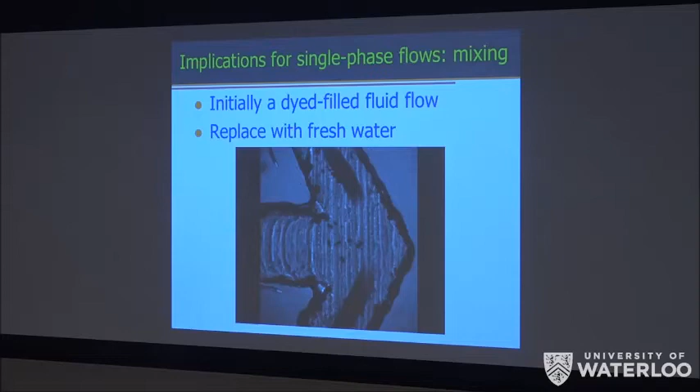So you turn on the fresh water, it comes in, and you'll start to see it rapidly clean the left part of the pipe. It rapidly cleans it, except there are these two vortex breakdown bubbles which only slowly leak ink, because there are trapped pockets of fluid inside the flow when the Reynolds number is in this critical range.

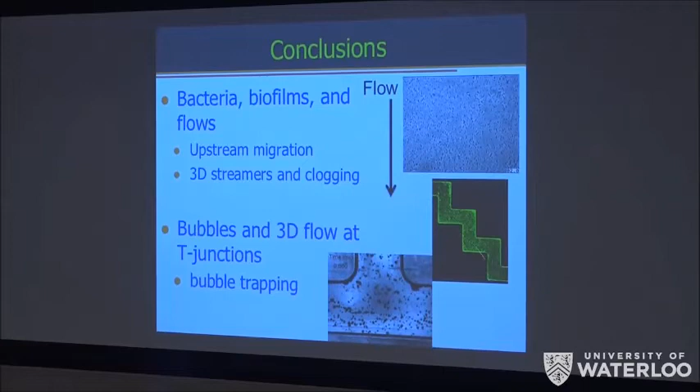So anyways, that's my little short story about the T shape at finite Reynolds numbers. Those are the three stories I told you. I tried to tell you a little fluid mechanics story. I've only picked very simple geometries, but that's why I think there's relevance to the work - because these geometries are fairly simple, not complicated. I showed you the upstream walking, the biofilm streamer, and the trapped bubbles. And with that, I've used 50 minutes, so I will stop and answer questions.

Thank you, speaker. See, you were so stunned you didn't know what to do. Well, I hope it was interesting. I mean, those are my three - my group does other things, but those are my three stories for today.

Okay, Michael already has a question. Does the rheology change with time when this polymer forms? So that's a great question - exactly what the rheology is.

There are now a number of groups around the U.S., at least in engineering departments, and actually one in Alberta I think, that are now trying to collect enough biofilm that you can measure its rheology. There are early studies of this. Does it change in time? That I don't know. What is probably true is, for any given rheology, as the biofilm gets thicker, it's effectively softer - it's just easier to shear. But its rheology, I'm going to guess, is probably not a strong function of time. As it gets thicker though, the whole system, as you know from just shearing thin films, is effectively softer.

Okay, yes, with the experiment you did with the biofilm streamers - if you did those experiments with dead bacteria, would you still get the streamers? That's a great question. So the question is, what about dead bacteria?

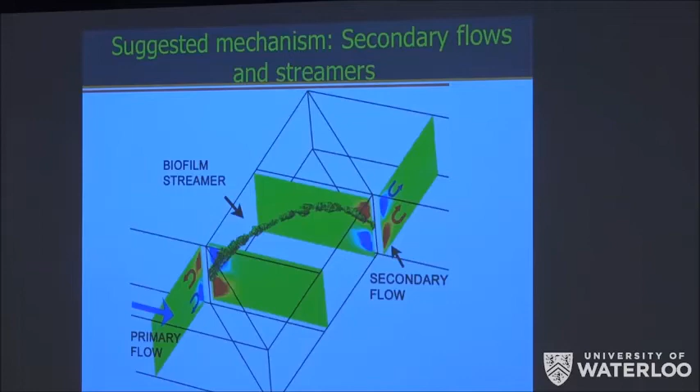This movie at least suggests how things get into the flow. In the neighborhood of the corner, you'll see a filament form. Now, where we think it comes from is this picture of a single phase flow. We did lots of numerical simulations and some asymptotics.

I tried to give this sketch of pipe flow. Anything that causes flow out of the plane is called a secondary flow. At high Reynolds numbers, I drew the picture of Dean, but that's not true at low Reynolds numbers.

At low Reynolds numbers, the colors red and blue tell you the vertical component of velocity, and they are opposite each other around the corner. At low Reynolds numbers, the Navier-Stokes equations are linear, and there's a mathematical feature associated with that: the secondary flow has to change sign about a symmetry plane.

So upstream of the corner, the secondary flow in the low Reynolds number case is going away from the middle. Downstream of the corner, it's going towards the middle. So the suggestion we made is that over a long time, if I have a soft material, maybe I'm accumulating material near the middle. Then, due to some instability, you can extrude a filament, and that filament will catch material.

Now, why is fluid mechanics important in that? If I give you a flow with curved streamlines, and I put a very thin filament in it, you might argue, shouldn't it just follow the streamline? Couldn't it just follow the streamlines around the corner? Maybe it just follows the streamlines—it's a little filament, it's a polymer, but follow the streamlines around the corner.